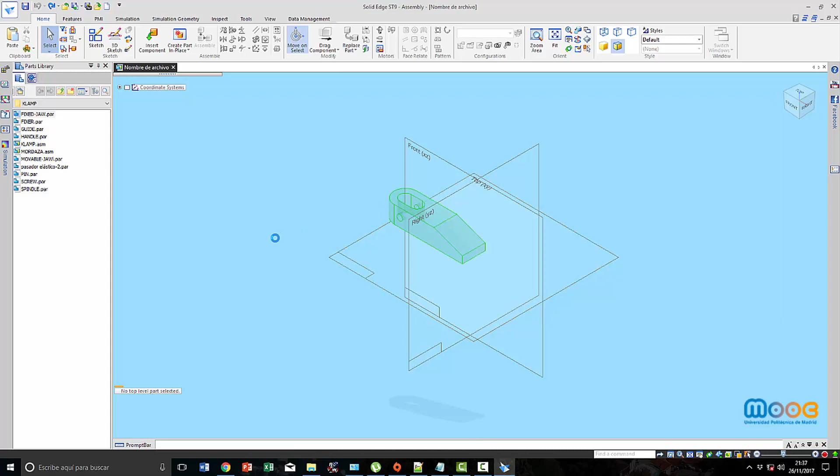In Unit 1, we are going to do the first step to construct a clamp. We have our parts already constructed, and we drag to fix the fixed jaw.

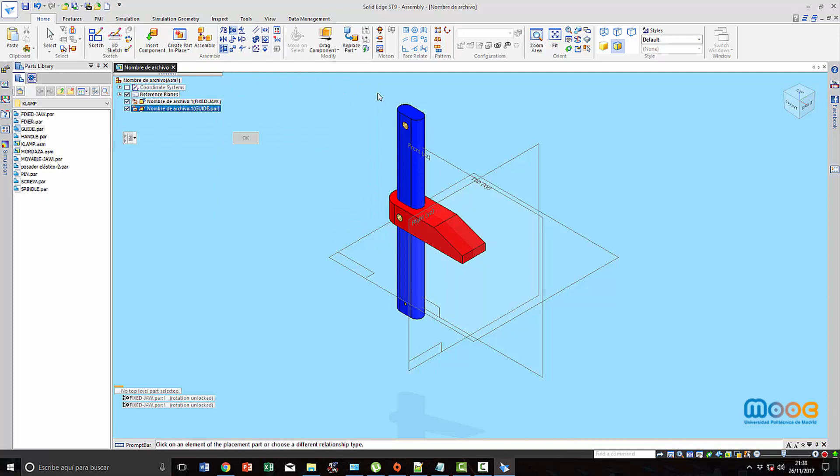Next, we drag and insert the guide, and we must state the relationships: axial align between this axis of the guide and the fixed jaw, and a second axial align between these two axes. Finally, I need to do a planar align between this face of the guide and the top face of the fixed jaw.

As I'm going to do the draft of the clamp, I need to position the elements correctly to have my draft correctly done.

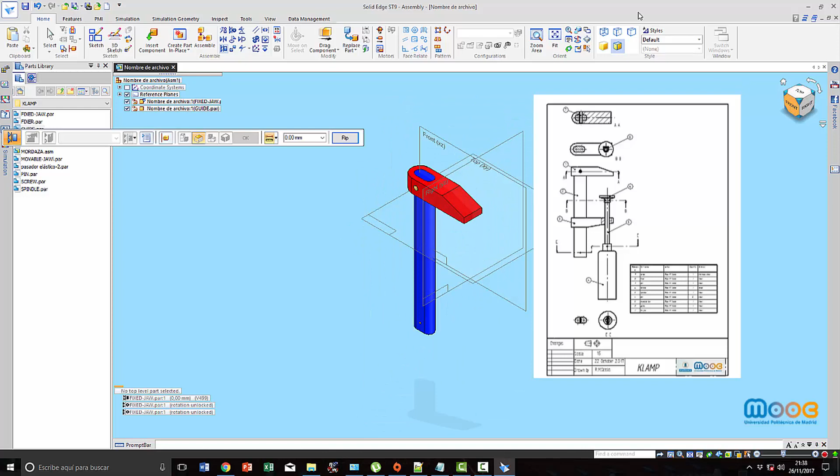Now I click and drag the next part, which is going to be the movable jaw. Again, I have to state the relationships: axial align between this axis

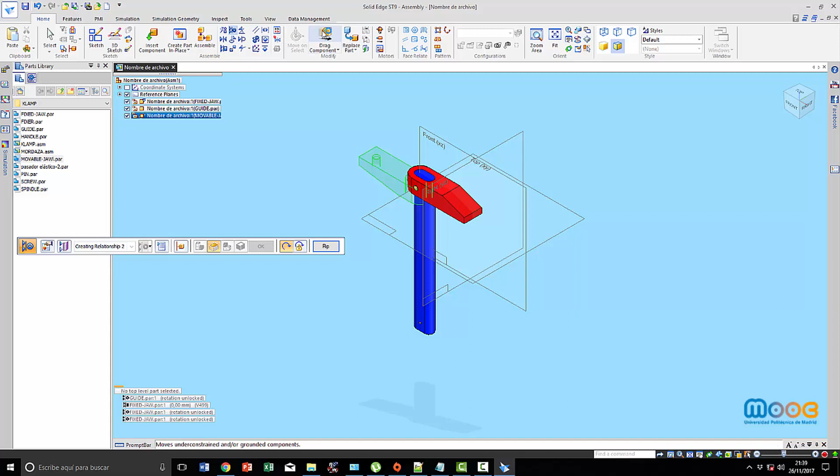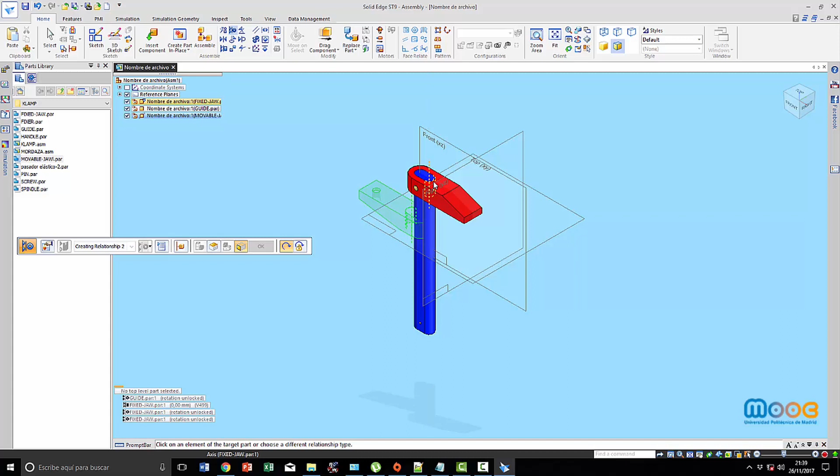and this other axis of the guide. You can drag if you like to have a better position of your parts when you need to select an element. So I drag a little bit and state the axial align between these two axes. Now I have my movable jaw correctly positioned.

The next part I'm going to insert is the pin, which is going to be inserted in the guide. So I state an axial align between this axis and the axis in the hole of the guide. Now I want to position the pin correctly—I want it centered in the guide.

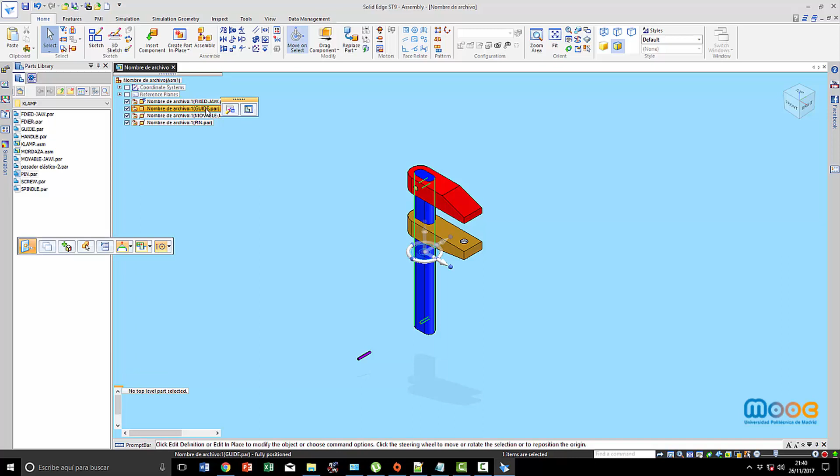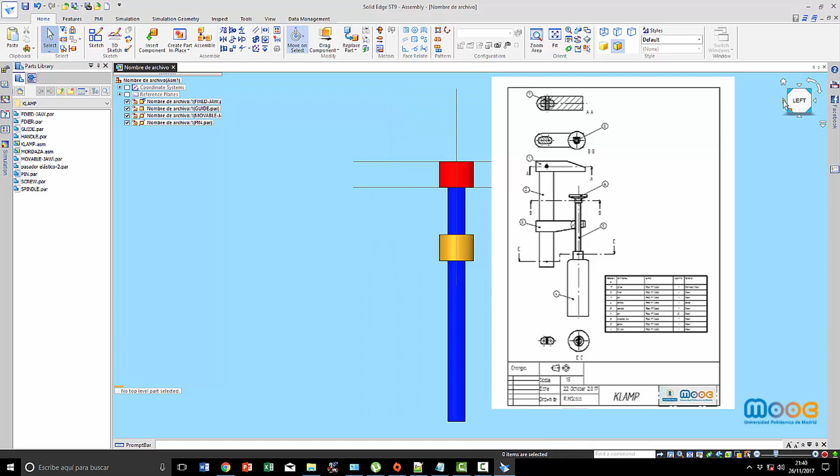So now I'm going to activate the reference planes for the guide. Okay, I have these planes now—they are the reference planes of the guide, not of the assembly. I change the point of view, and now I zoom so you can see it better.

I'm going to establish a relationship, in this case mate faces, between the face of the pin and this plane of the guide.

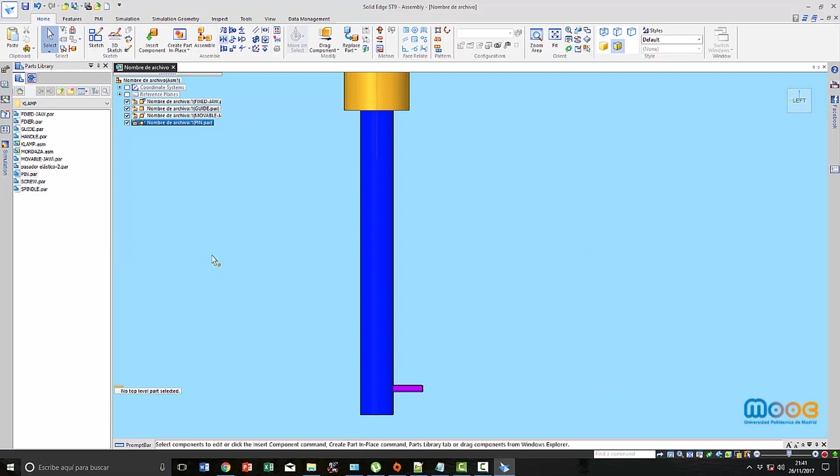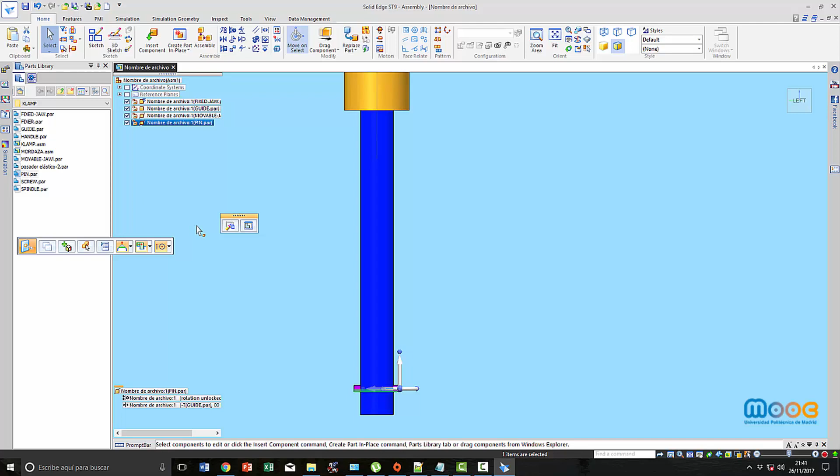Now I'm going to move it, so I click on the last relationship I have stated and insert 7, so it moves 7 millimeters. Now I am sure it is correctly centered—7 millimeters, because the pin's length is 14.

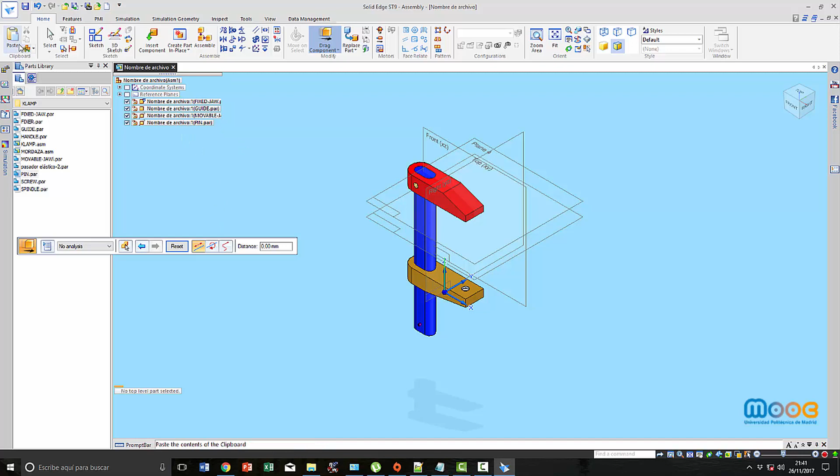And now the pin is correctly positioned, and it won't move, because when I insert motors I need to have the parts correctly positioned. I drag now, and I'm going to hide the reference planes, because now I don't need the reference planes for the guide anymore. I'm sure my pin is perfectly centered and won't move when I insert the motors.

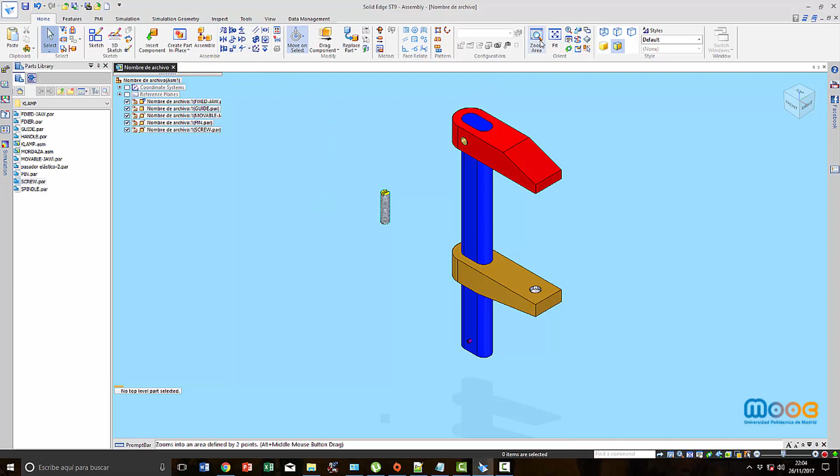This is the screw I have dragged, and I'm going to state the relationship.

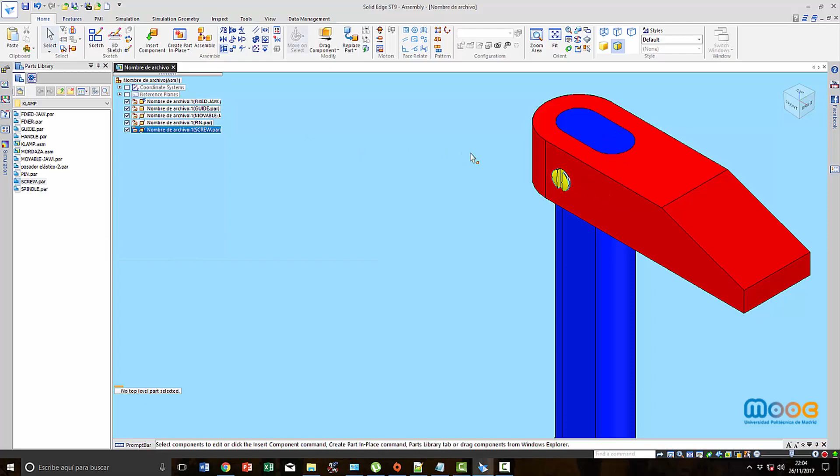Of course, axial align between the axis of the screw and the hole the fixed jaw has. And now, to have it correctly positioned, planar align between this face and this other face of the fixed jaw. So again, I'm sure the screw won't move when I insert motors.

This is the end of Module 7, Unit 1. In Unit 2, we will finish constructing the clamp.